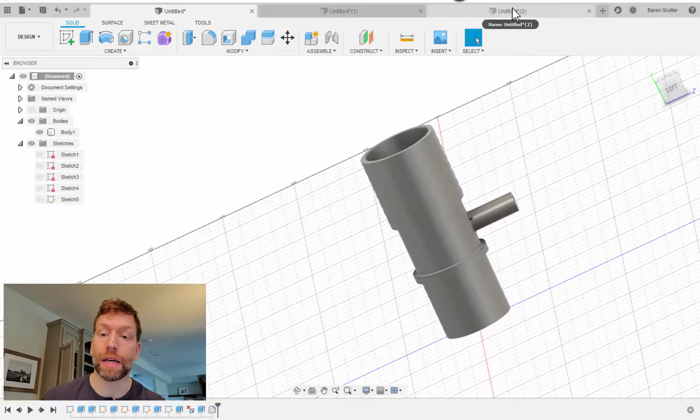Okay, so I'm going to go ahead and repeat a little portion of the video where I create the air inlet. I did this in the first video. I think there was useful content in it, but I spent a lot of time because I had some mistakes, and I'm not going to re-edit and film that whole video. So I'll show you the summary.

So what we need to do is create a sketch, extrude it, and make two different bodies, separate things, and you'll see.

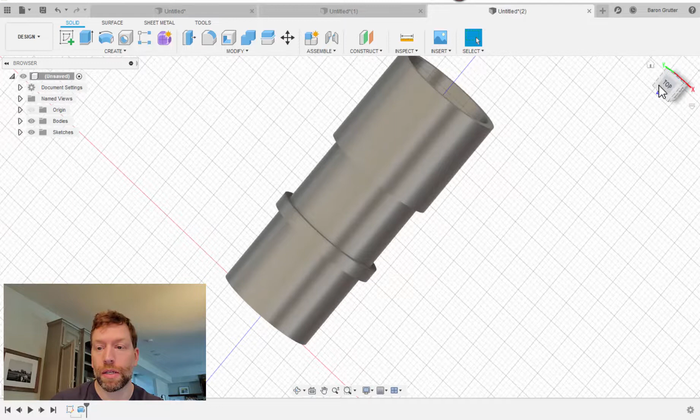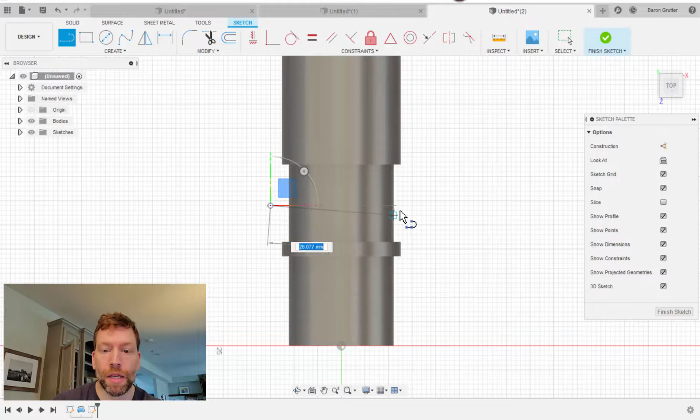First of all, I need to figure out where I'm going to put this. So what I like to do is get centered right over the top of this. This isn't real scientific here, but I'm going to create a sketch right on this plane, just so I can make sure I remain centered. You could use the constraints to find the actual center of this object, but instead I'm just going to eyeball it, because where this inlet comes in, this direction isn't that important. But now I know the center.

As long as I get in the middle of this line, I'm in the middle of this object. So I can now hide the body. That's the whole moral of the story here. So now I can draw without worrying about it.

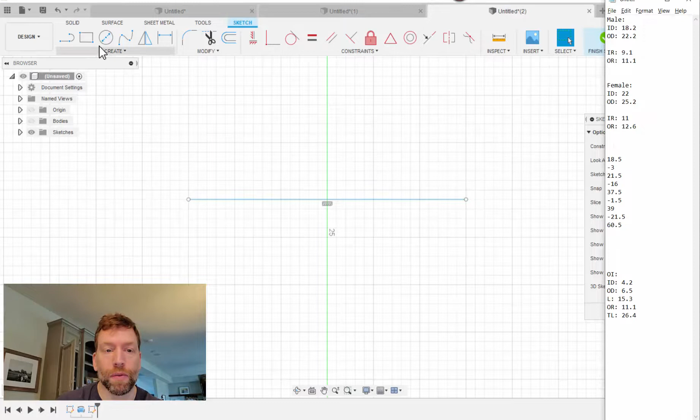So I know from my measurements, I need the inside diameter to be 4.2, the outside to be 6.5.

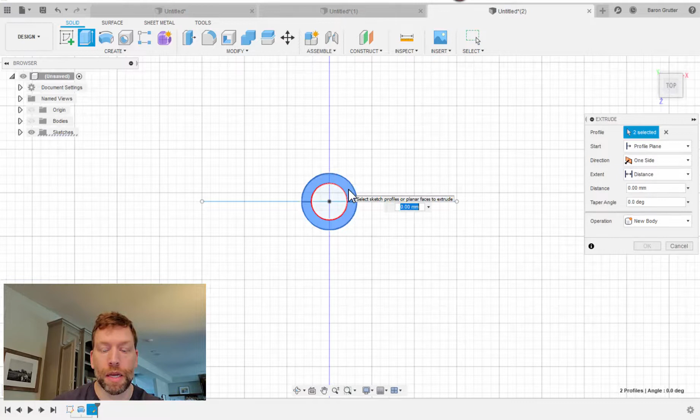And that's it. So now I'm going to extrude this part, both of these pieces, and extrude them. I think it's 26.4 millimeters, because that's the outside diameter of the entire portion of the tube, the distance from where we're at in the middle here to out here.

It's the radius of this portion, the outside radius, and I wanted this body to stick off the full length. This tube needs to be 15.3, so the total distance from this point is 26.4 millimeters.

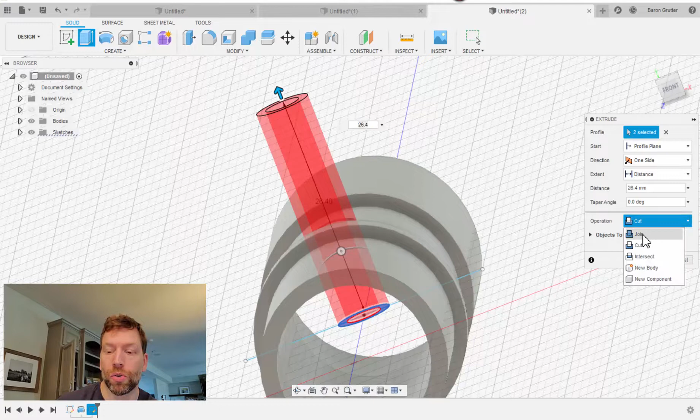Now I'm going to make sure—right now it thinks it wants to cut, the software just assumes it's a cut. I want it to join, I want it to be a solid piece in here. I want it to join. Click OK.

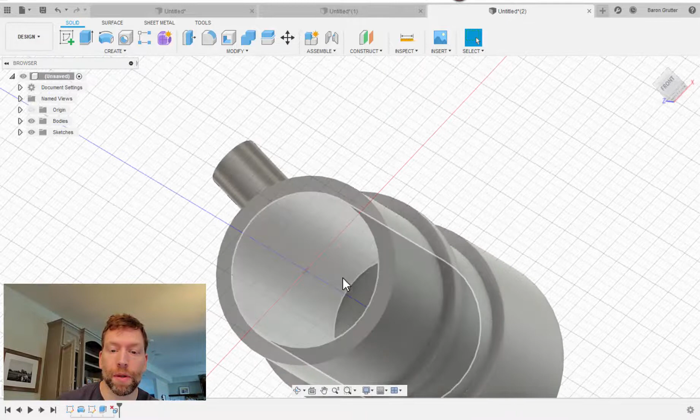So now what I'm going to do is simply click on this, click delete, and now it's gone. The only problem is there's no escape, no vent for the air to actually let into the inside of here.

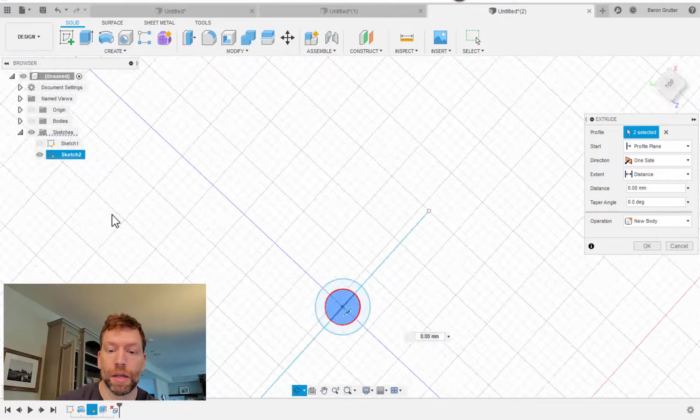So that's where I'm going to turn my sketch back on, and I'm going to click extrude, click on the two internal components. If it was too hard, if you were making something longer where this view wasn't helping, you could just turn off the body, click on them, turn the body back on so this works.

And I'm going to extrude it, we'll say 30 millimeters, it really doesn't matter. And now I'm going to let it cut this time. So that was sort of a Boolean subtraction. So now there's the exit.

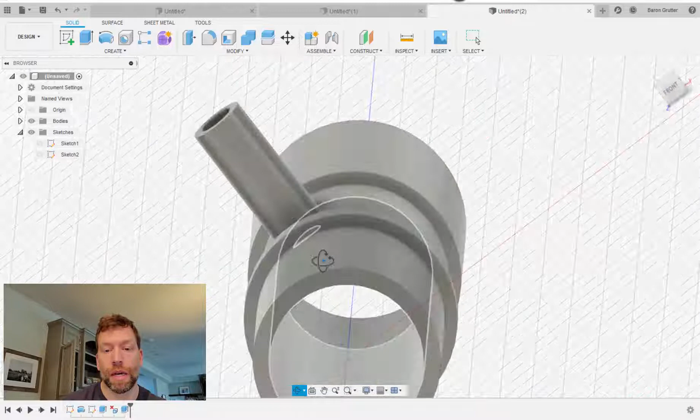So there we go, we've got inlet, outlet. I can now come in, if I want things to be less severe of an angle, I can come to the fillet, click here, click on this round rim, change it to, we'll say 1 millimeter, and what it does is it creates it sort of rounded.

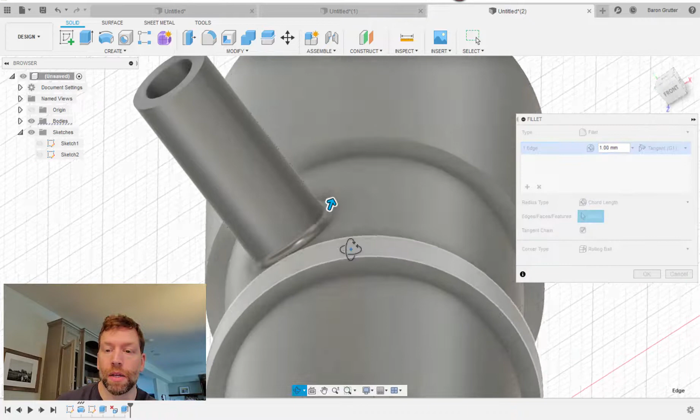I like to change this—the default is just constant radius, I'd rather use chord length. I'm going to say plus, because I'm going to come to the inside and do another fillet here, but I said plus because I want a different radius for this one. It's a smaller circle, so I don't want as big of a rounded area, so instead of 1, I'm going to say 0.5.

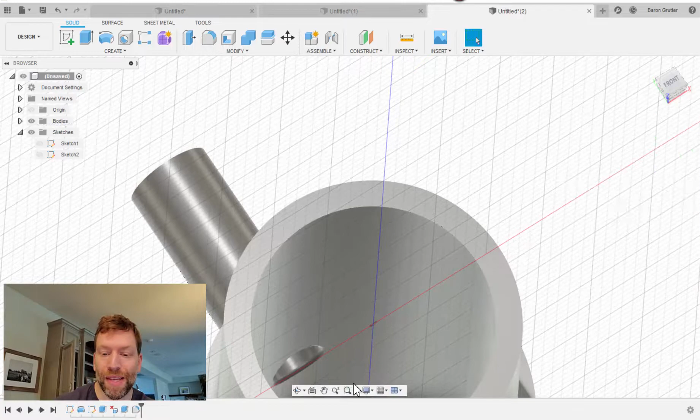Do those rounds even matter? No, they just look pretty. Now, they can be functional in that if it's a sharp corner, it's more likely to break off—the shear strength. The inside one has no relevance, it's just to look pretty. You can do more fillets on these sharp edges if you wanted things to look prettier. In this functionality, I don't think this matters. Most of my designs, I do fillets almost everywhere, but for this, I don't think I would. I want things to be sharp because they create friction, which makes things hold together.

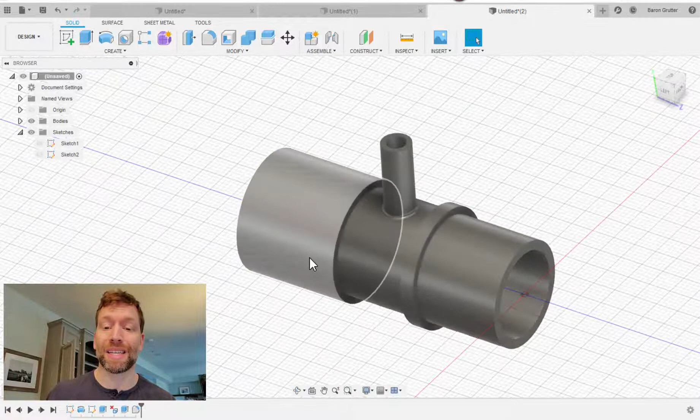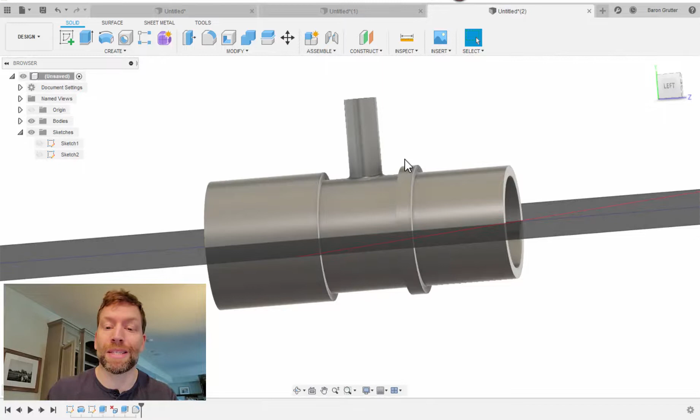Hopefully I gave you enough information to know how I made that without having to watch the other videos as well. It all comes down to measuring the inside diameter, the outside diameter, how long you want it, knowing the diameter of this cylinder right here. And that's basically all I kind of skipped around on for you. All right, hope this video helps.